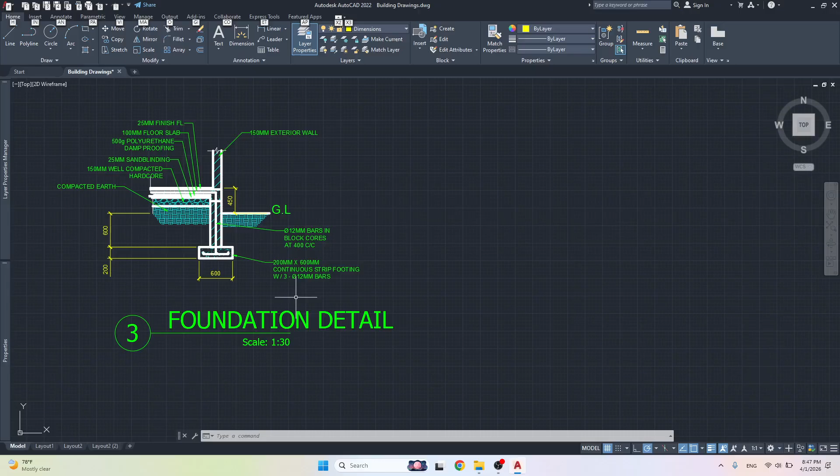In this one, we're going to be looking at another foundation detail, but instead of the corner of the house, we're going to be doing one in the middle of the house.

So let's say, for example, this foundation detail would represent... if we had a cut right here, for example, if we were doing the foundation for this part of the house right here.

So the first one we did was this, the end of the house. But if we were supposed to do one for this load bearing wall, which should have a foundation underneath it, the only real difference between the two is that this one is in the center.

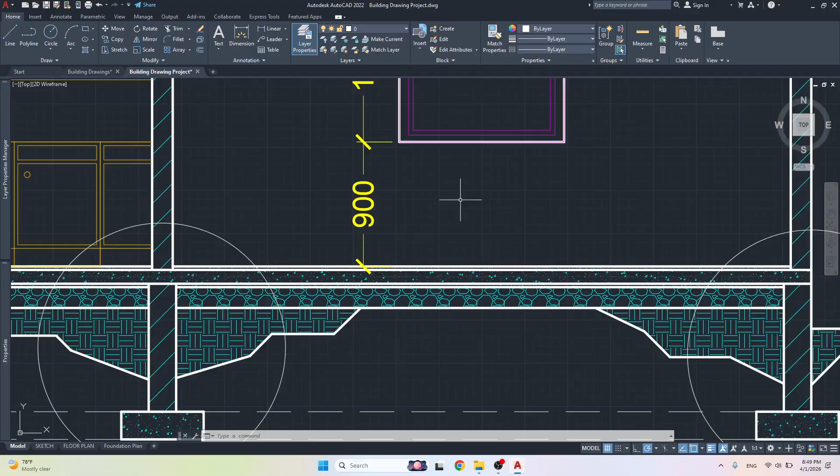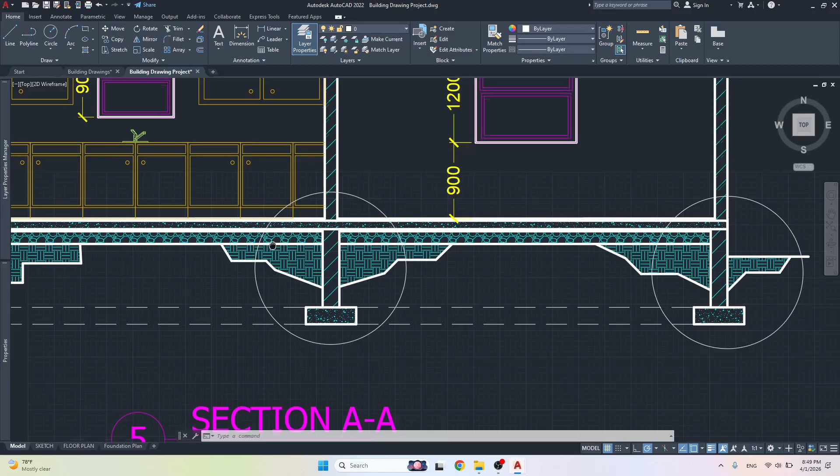When it comes to the walls at the end, notice that the external walls for the superstructure of the house align with the end, into the foundation wall, which is 8 inches. This is 6 inches. But here, you'd notice it's centered between the foundation walls.

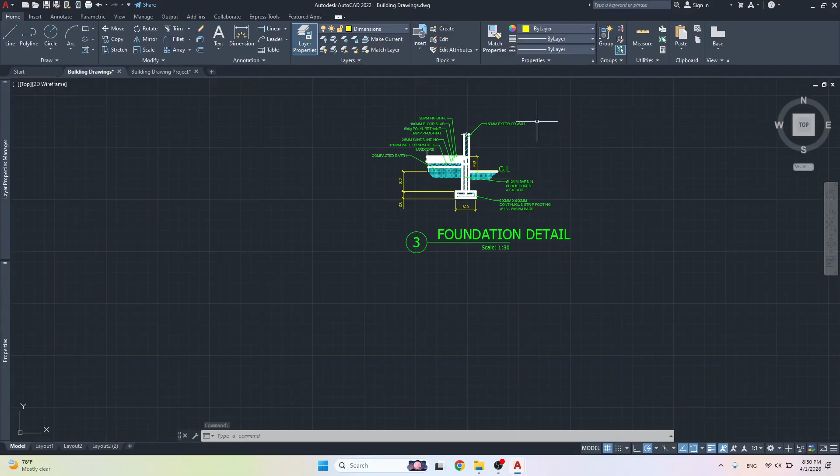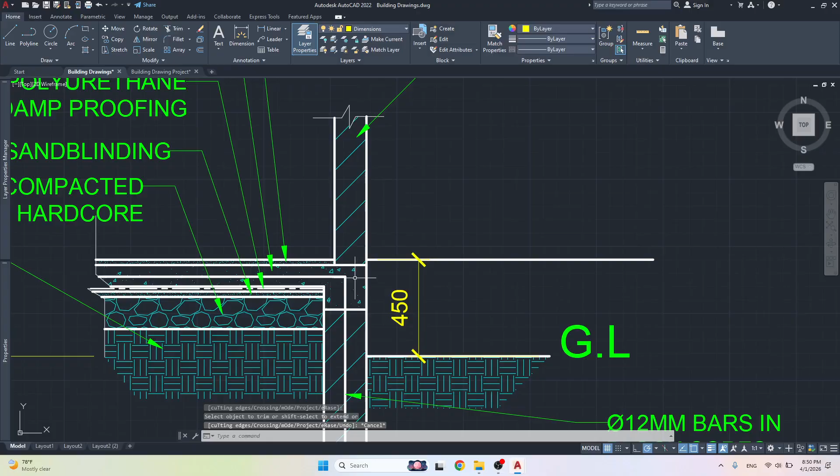So that's what we're going to be doing. Now I could simply take this drawing, make a copy of it, remove this and redraw it more centered right here, extend these lines across, and trim them out. But for the sake of those who might have missed the first video, we're going to do it all from scratch, so I don't have to explain much in this drawing.

So this is going to be a much shorter video.

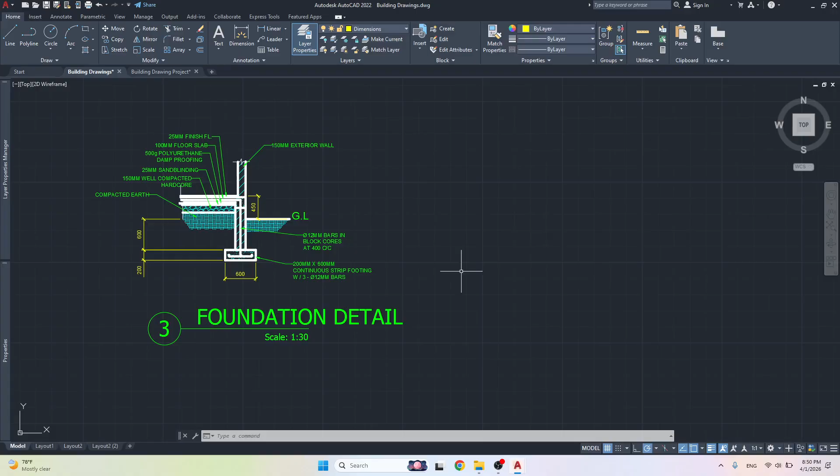All right, so firstly, let's start with some walls. Remember, we're going to do the footing first, which is 3 times the width: 600 millimeters, which is 3 times the width of the foundation wall.

The foundation wall is 8-inch blocks, which is roughly 200 millimeters. So 200, 200, 200, that's 600. And it's going to be at a minimum.

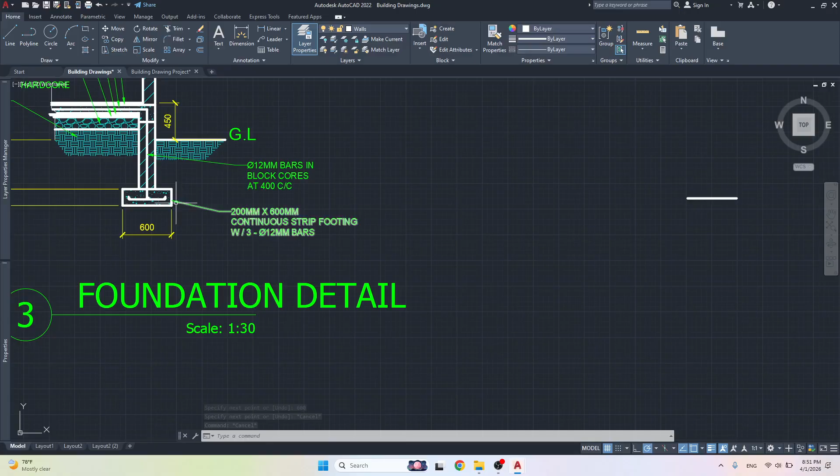In this drawing, we're going to be doing 8 inches, but as you know, by St. Vincent standards, it should be no less than a specific amount—I think it's 9 inches. So this is going to be 200, which is 8 inches. Come across 600, and then we go up right there.

Now, again, I'm going to draw the foundation walls that are centered. So I'm going to offset this 200 from each side. So we have 200, 200, 200, 200, 200, 200.

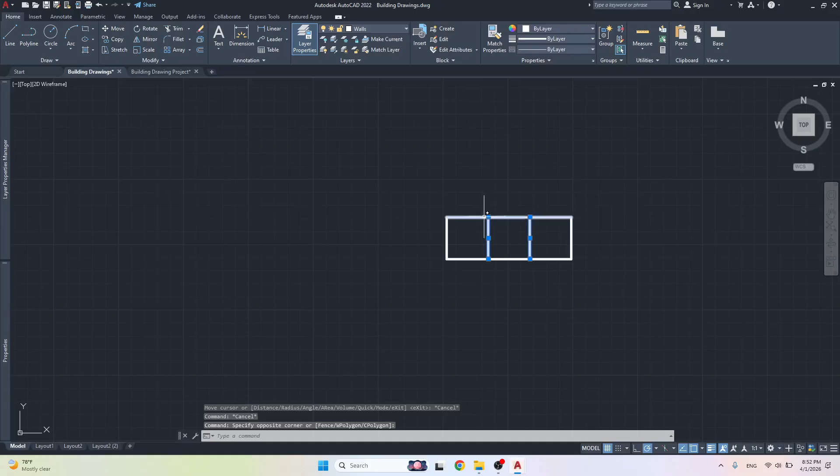So let's just extend these. Well, before we extend them, let's do the ground line. We know that the footing will be buried at a minimum of 2 feet.

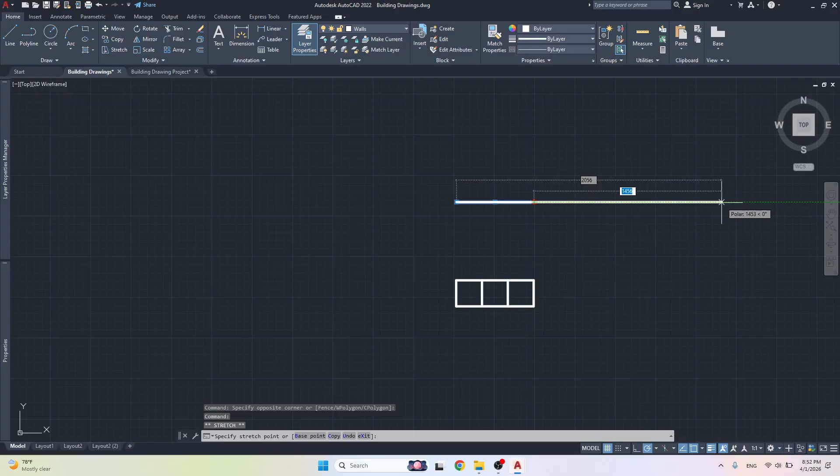So let me offset 600 millimeters, which is 2 feet, upwards. This is going to be my ground line. Let me just bring it across like so. Actually, we don't even need the ground line, to be honest, on this side for the nature of what we're doing, but I'm just going to use it right now as a reference.

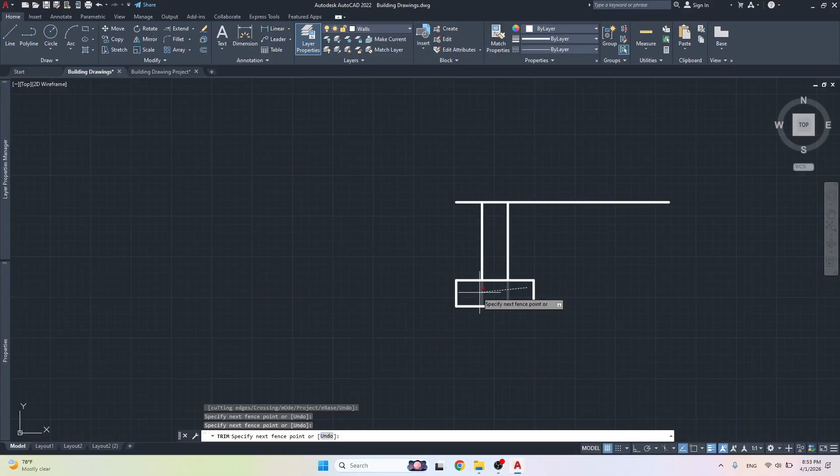Alright, so now we need to extend these lines up, and then we can trim away these down here—we don't need them. So this is where the ground line would be here, showing that the footing is buried at least a minimum of 2 feet below the ground.

Alright, so what we need to do now is offset so we could get the finished floor. So let's offset 1.5 foot. As you learned in the last video, it's supposed to be no less than 12 inches by St. Vincent standards. So we're going to extend these lines up to there.

Then we can get rid of the ground line for now. Alright, so let's just now walk our way back down. So this is going to be our finished floor.

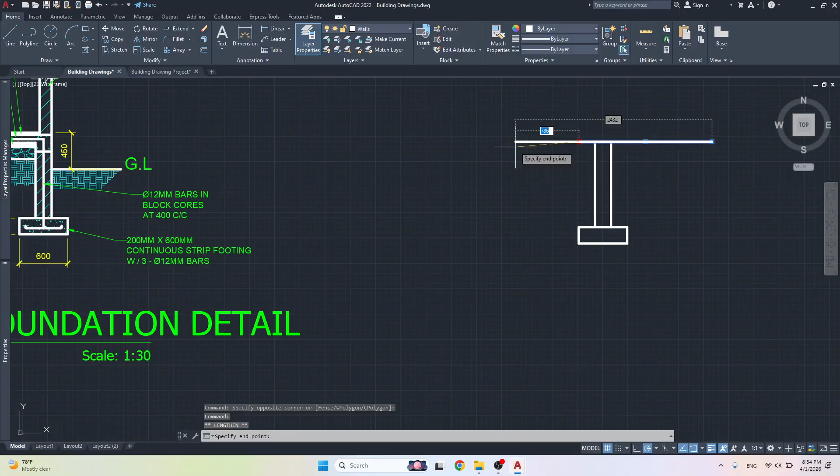Remember what we're doing is we're putting this wall in the center of the foundation wall, and then we're going to be having everything over here—we're going to be having it on this side also. Okay, it's basically going to look like this, but with all the details inside.

Alright, so let's walk our way back down. But before we do, let's offset that inch. This is for the finished floor, but let's remember that the wall is not going to be built on top of the finished floor like so. The wall is going to be on the concrete slab, which is this line.

Alright, so to do this, I need to just find the center. So I'm just going to redraw this line so I can know exactly where the center of this line is, like so.

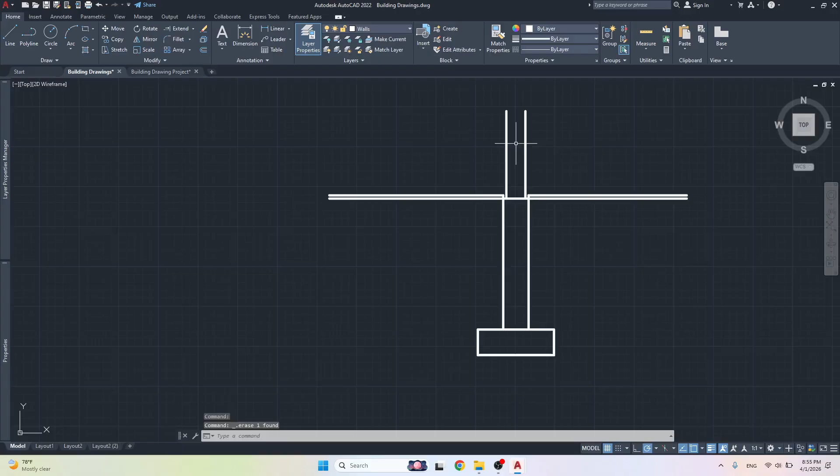And then I can offset it 75 millimeters on either side, and delete the middle line. So this should be 150 millimeters.

So there we have the walls for the superstructure, the structure above ground, and we have the concrete slab right here, and this line represents the floor finish, when you plaster the floor. Alright, so we just need to trim this out.

And extend these all the way up to the wall. So here we just extend these up to the wall. Alright, so now I could just merge these three lines. I select this line, and this line, J, enter. Now they are one line, they are rejoined.

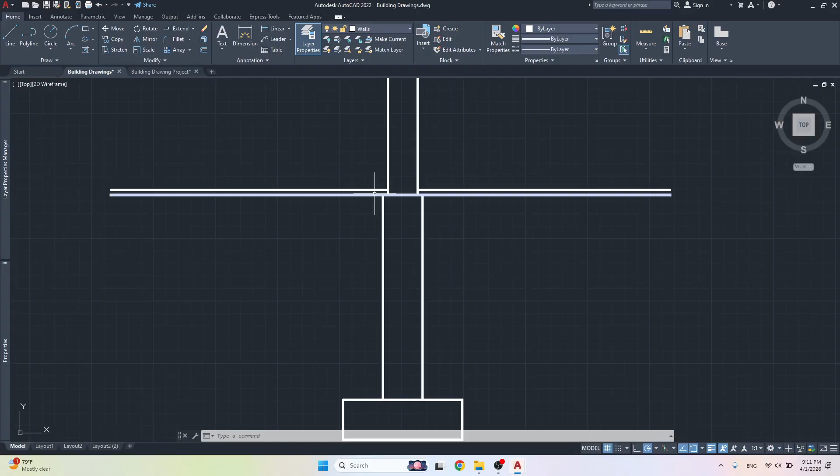Okay, so what we're going to do, we're going to do the floor slab, so offset 4 inches, that's about 100 millimeters. Alright, so we offset down 100 millimeters. Then underneath this, let me do 25 millimeters offset.

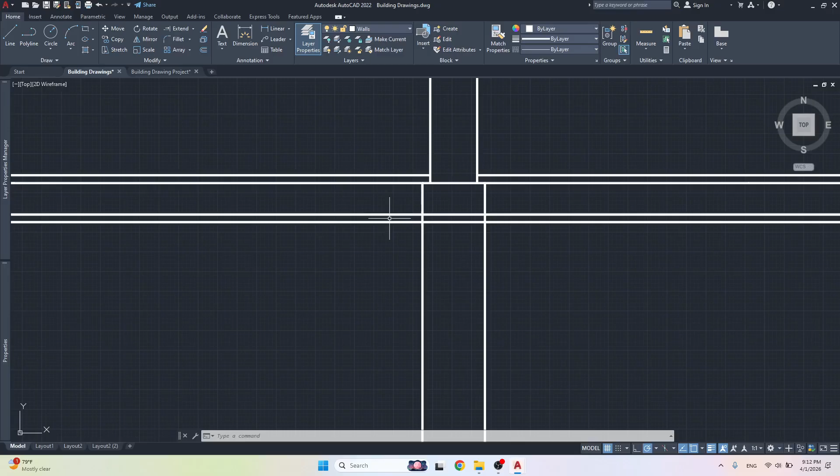This is where I'm going to put in the damp proofing. Some people don't put this, they would mention it, but they won't actually put it because the damp proofing is really, you know, as thin as a plastic bag. It doesn't need a whole inch, but we're just doing it for representation's sake. So we'll put a line through the middle of that, as we did over here.

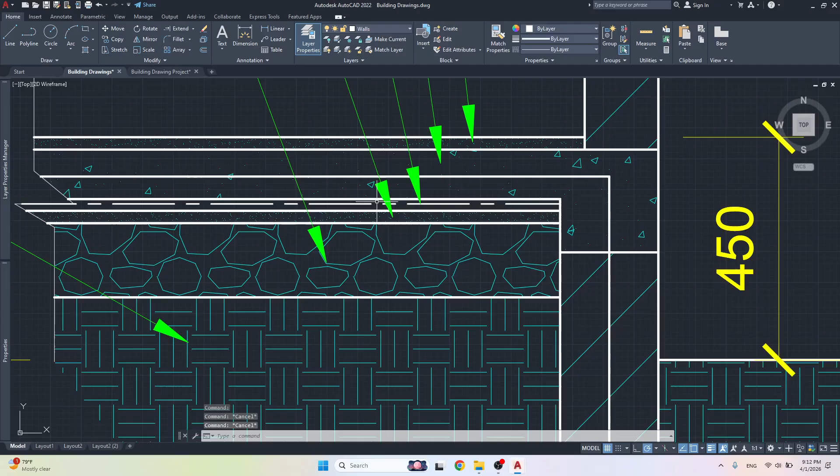Right here, this line, and then we'll do the sand blinding layer, another inch, so offset 25 millimeters, like that. So this is our in between. Here will be our sand blinding, and then underneath that will be the hard core, which will offset 6 inches, 150 millimeters.

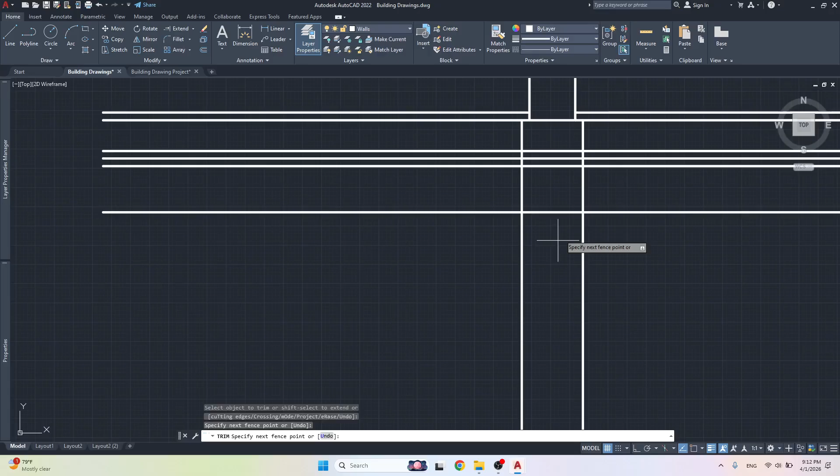Alright, so now we could just clean up in here all these lines, clean them out, and we have them on both sides. Let me just fill in the rest of the information. So let's use the wall layer.

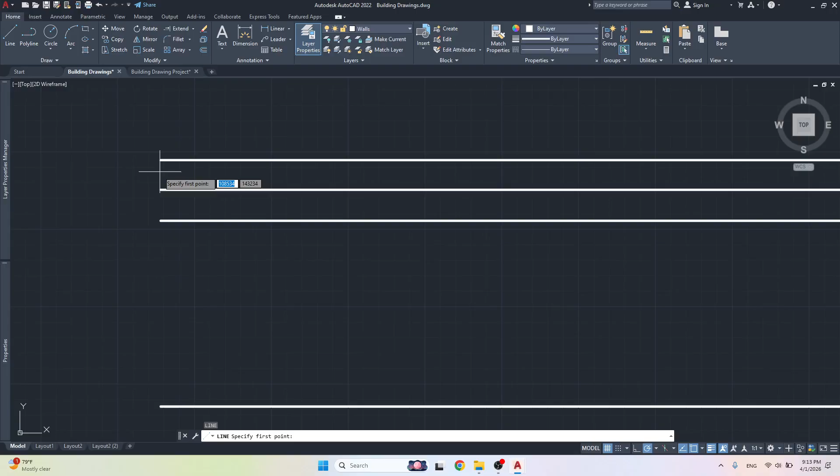As I said, in between here, I'm going to just draw a line all the way through, and then I'm going to turn this line into a center line, and let's make it a little thinner. So maybe 0.20, and we've got to change the line type scale.

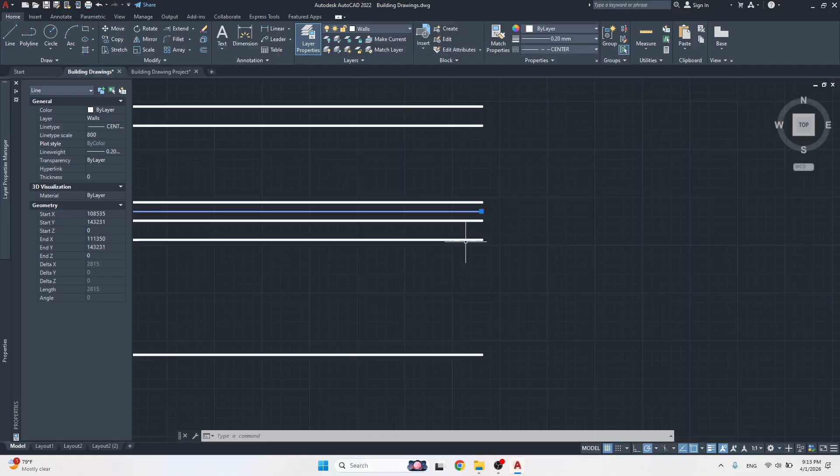I don't know what I used in the last one. It's a little too big, actually really too big. So let's see, 100, that looks good. I'm not sure what I used last time. Let me see, the last one is not. I used 30 and center. Wonder what the line type scale was. 100. Alright, so 100 is fine.

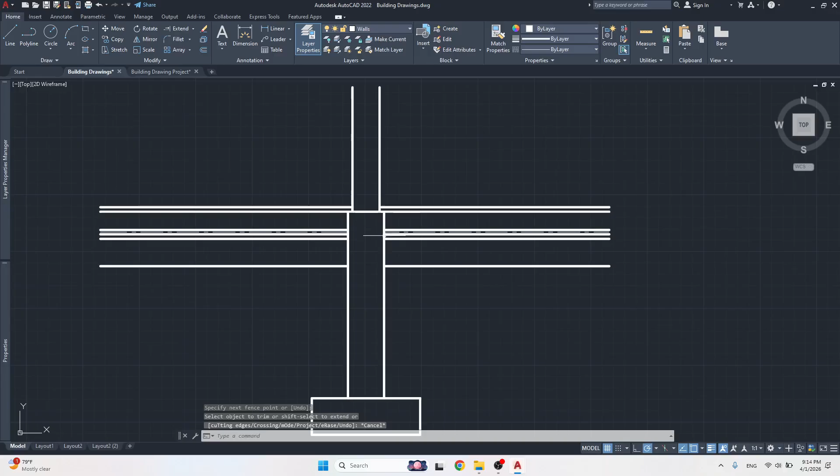Let me just trim this out. Whatever you choose, just be consistent across all your drawings. Alright, so here we have everything.

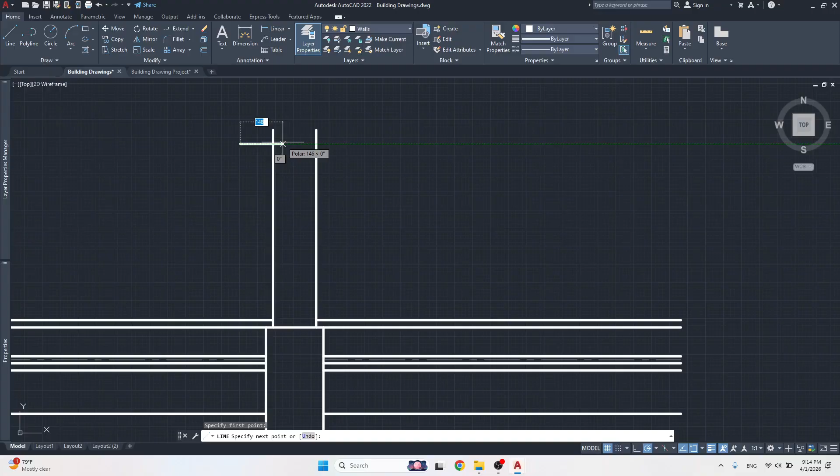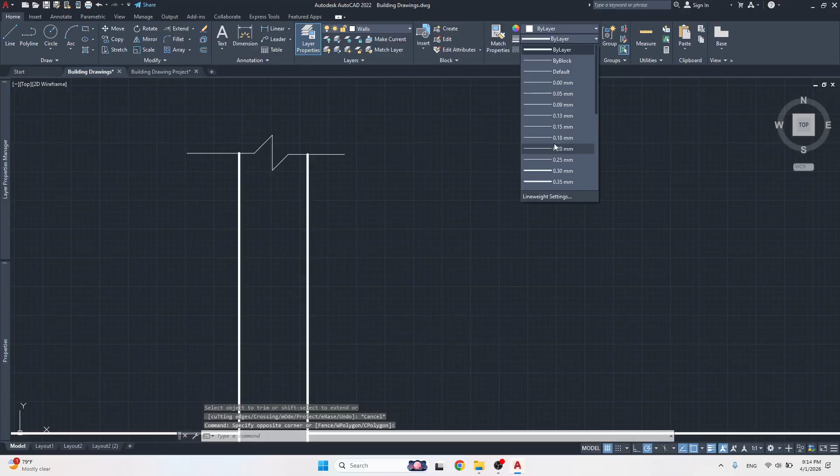We'll just trim away. Right, so as you know, this long break line simply means that... we'll put one here. And right here, and come through like that, and then we'll just trim away the excess on this side.

I'm gonna copy this and put it on the other side right here. Is that too far? Okay, that's fine. And let's trim away all this. Excellent. Alright, so this just means that the line continues, all these layers continue, but we just want to stop it right here. Okay, so let me just change that.

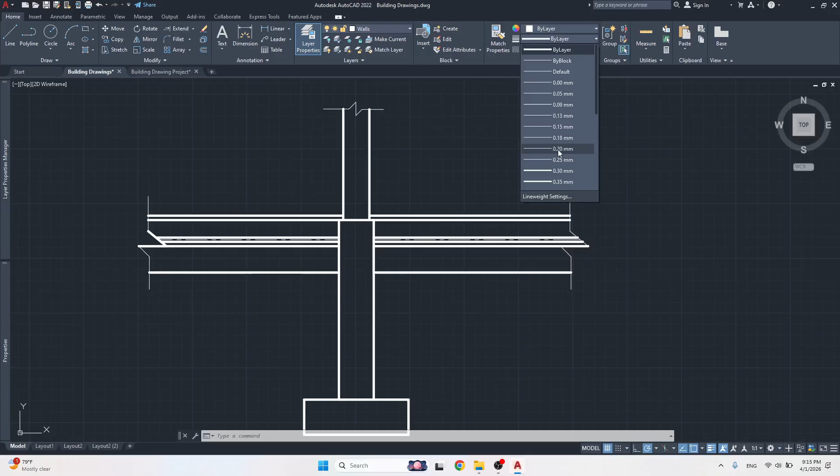Alright, so again, we want to just put our hatch. We'll put in the hatch first this time, so that when we put in the steel, it would be a little easier. Alright, so let's use this one.

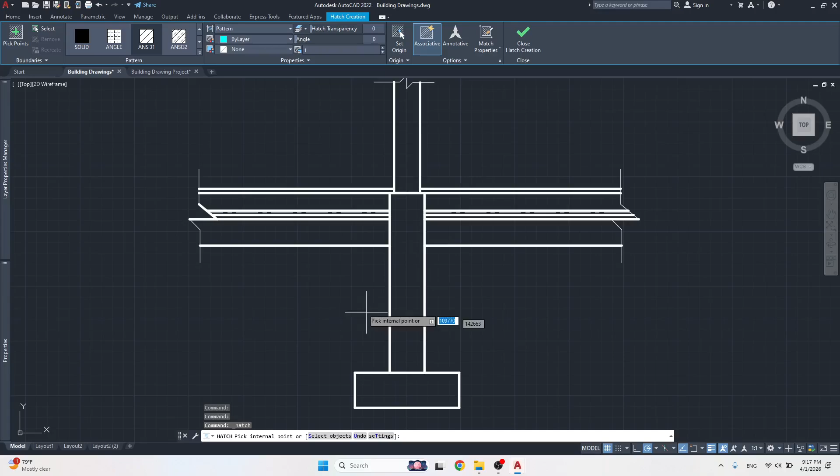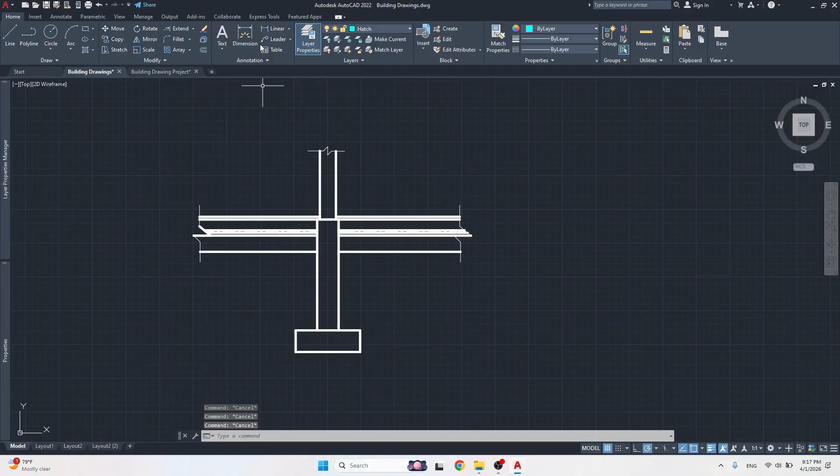So we'll use these, as I said, for the lines inside the hatch line. I'm not sure what I used in this one. Line type scale 800. Alright, so we'll change this to 800.

You could choose whatever you want. Escape, and then we'll use concrete, this one. We have to change this.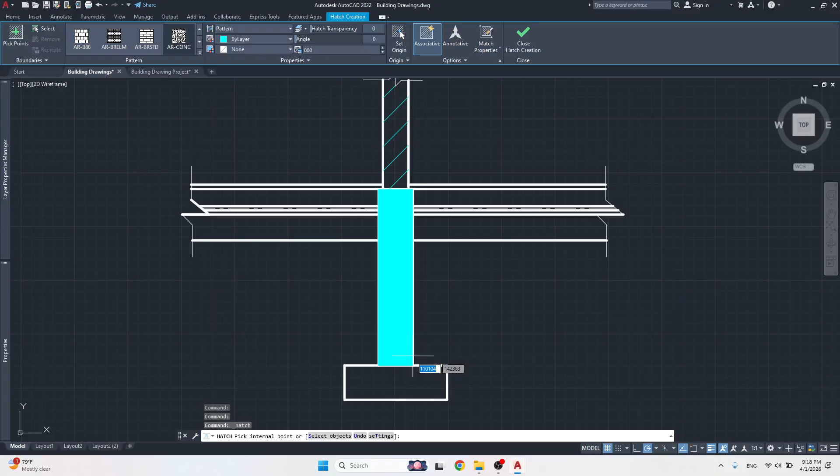Still too big, 50. I'm not sure what I used in the last one. So let's see, 20. Right, that looks fine. So the concrete slab.

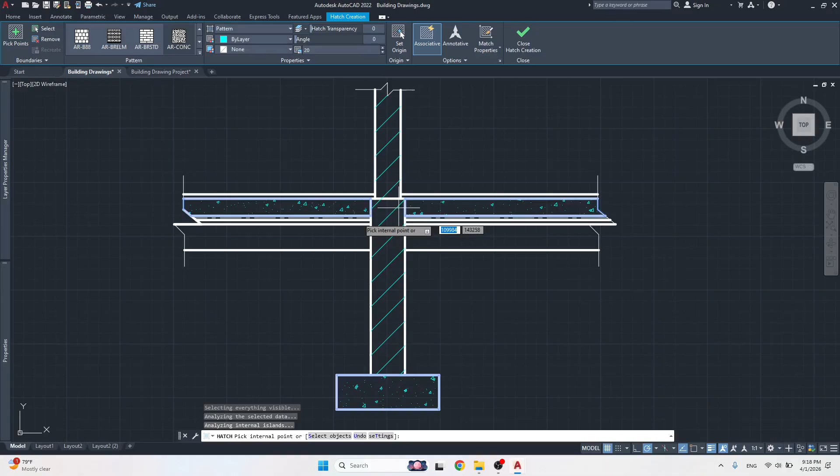Okay, so what's next? Let's do escape, and then we'll do another layer. Alright, so we have the sand blinding on the finished floor. So we use AR sand.

Let's see what we can use here. 5, alright, this is a little too much. So let's say maybe 10. Let's see if that looks, yeah, 10 looks similar.

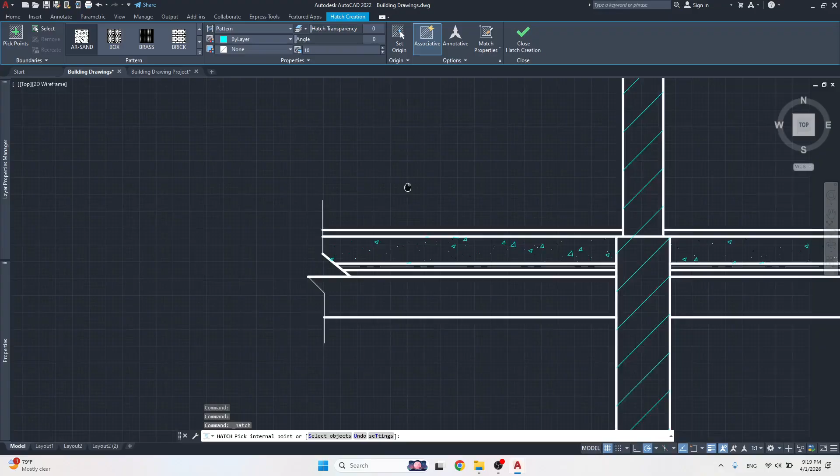Alright, now I could always just match properties to the one that I previously did. So that's the finished floor, and then here's where we're going to put the sand blinding. Down here now we have to put our hardcore.

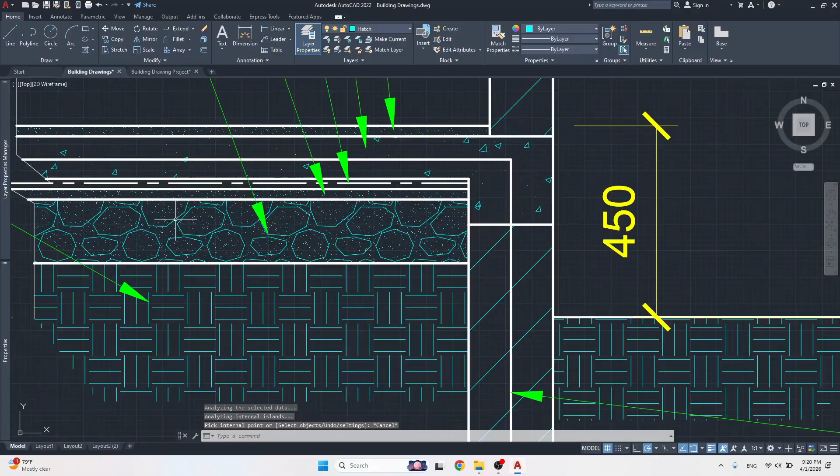200. All right, so we'll use that over here. Let's see what this is. 300.

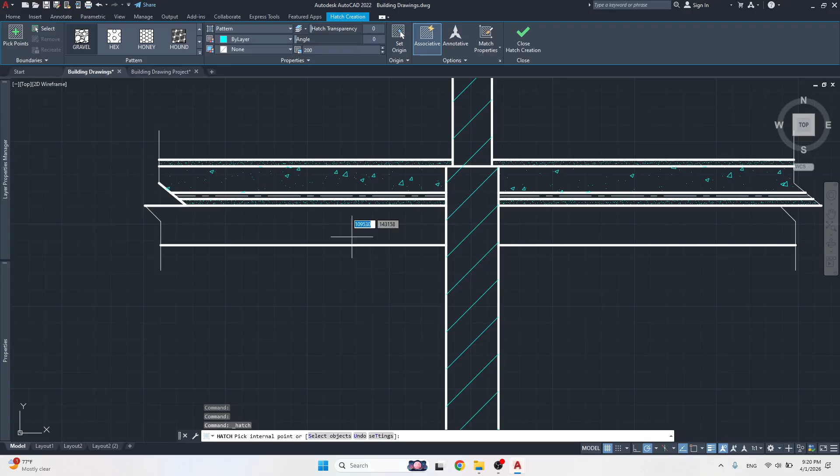So let's look for the gravel. I think I passed it somewhere. Nope. Gravel, and I believe it's 200 we used for this one. So there, and then we can figure out what these should be.

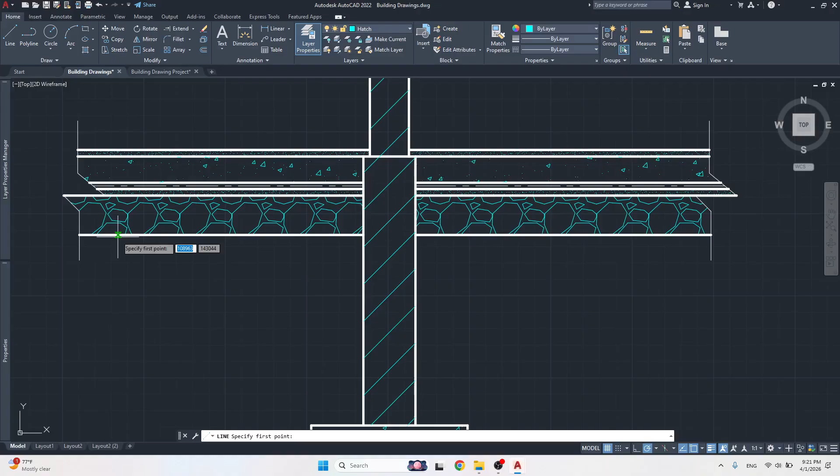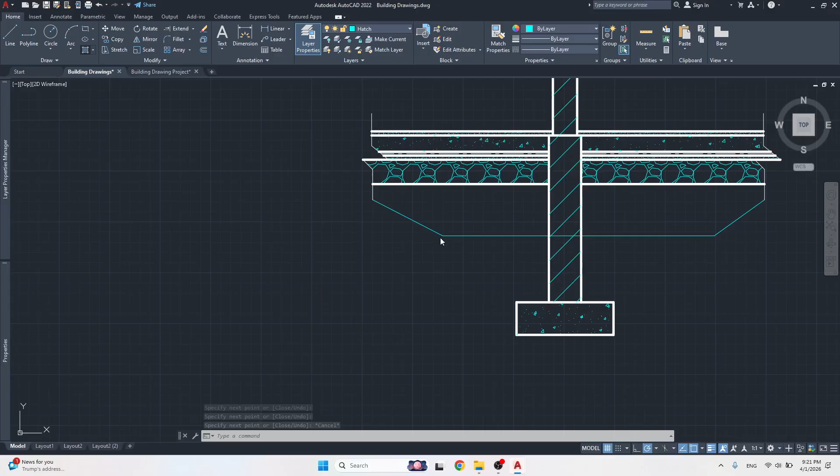All right, so let's draw a line to represent our compacted earth, this is where it's going to go. I'm going to remove this line just now anyway. I think we use 300 on the other side for the compacted earth, and then we could just get rid of these lines.

Alright, so it looks a little neater. So all here will be compacted, but we're not going to draw it all around this, it's going to look too crowded. I mean, this is basically drawing. We just need to put the steel inside.

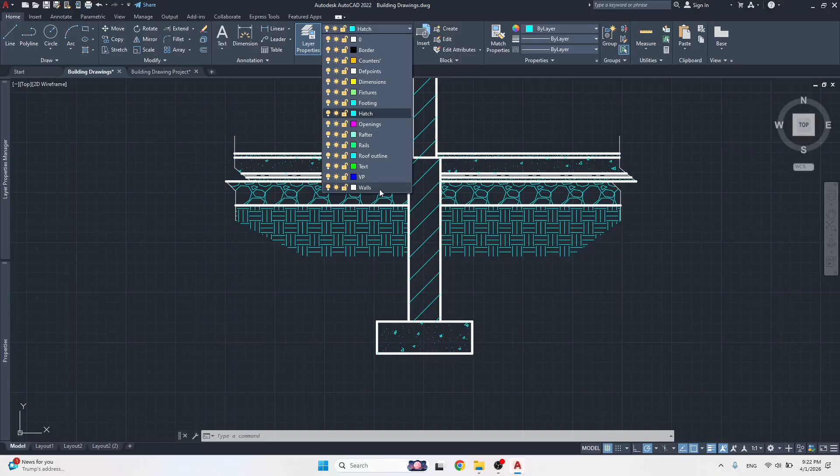So let me just switch back to the walls layer, which is very thick, and let's offset. I believe it's 3 inches, so that's 75 millimeters. Offset here, here, here. Then I'm going to fillet it.

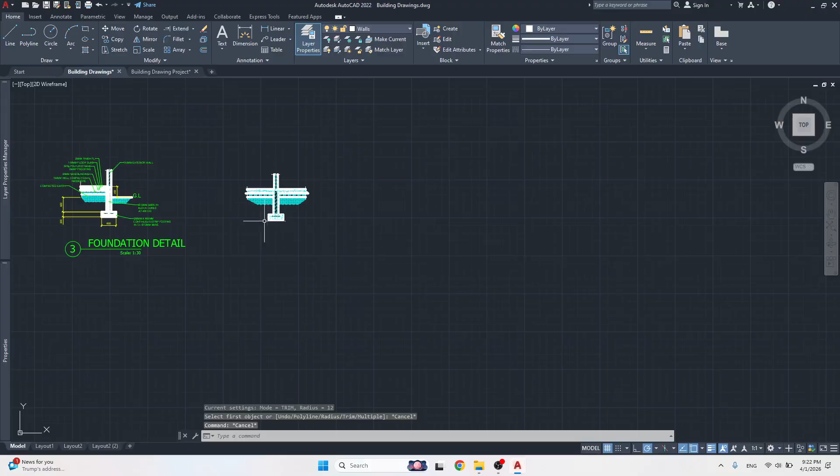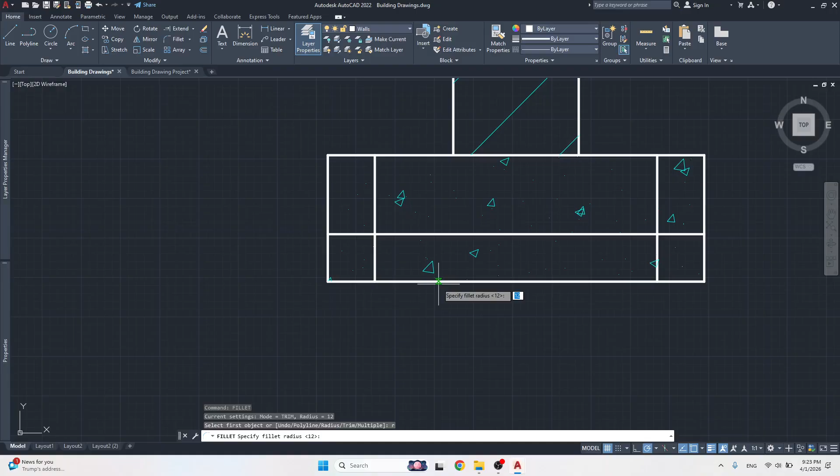Not sure what radius I used. This circle has a radius of 6, so the right 12 is the radius I used there. So let's fillet it with a radius, our radius 12 is already there, yeah. Here and here, and then I didn't hit multiple here and here.

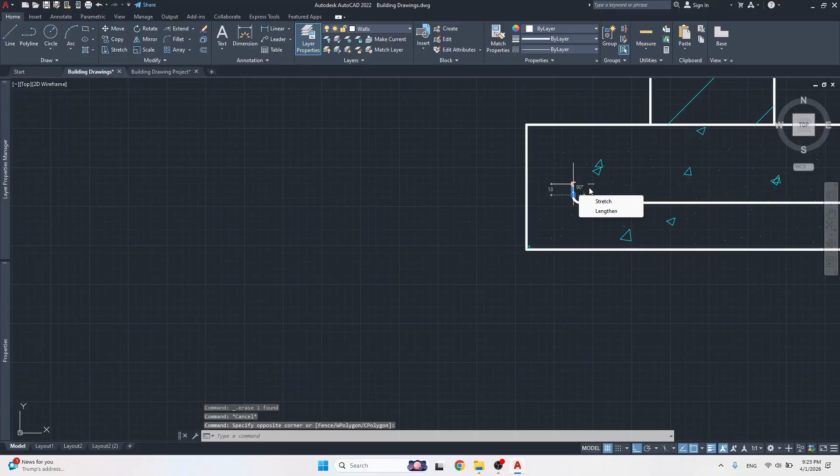Alright, so let's bring this down to about here, let me just keep it straight. Bring it down to about there. Now I could actually just get rid of this and copy this one. Pick it up right there and carry it across there, just for the sake of consistency.

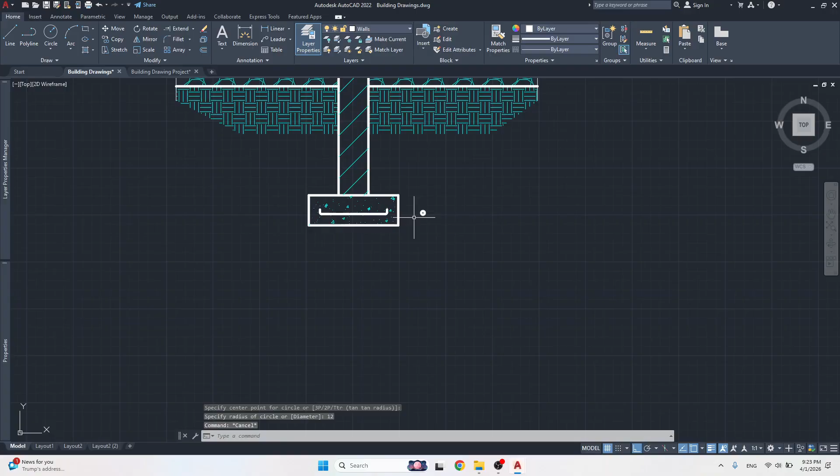We're gonna take some circles, we want one in the middle, but the radius of the circle is going to be 12. Is it 12? I believe it's, let's see if it's the same. So the radius, diameter is 12, so the radius is 6. Right.

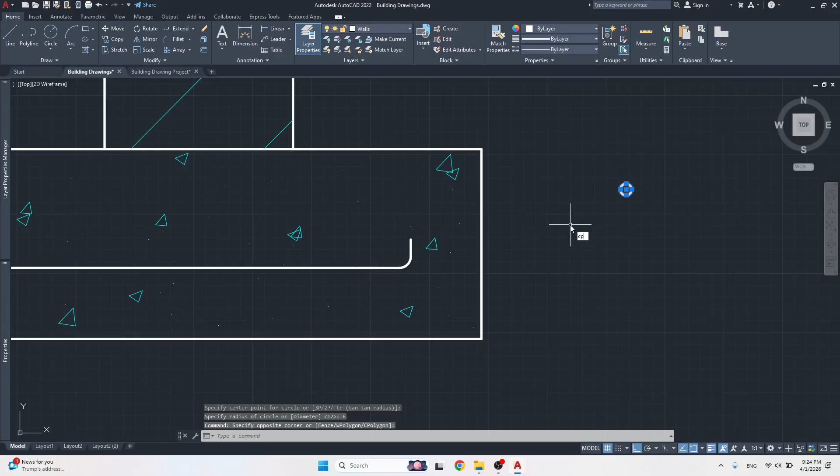Alright, so let's do a circle, radius is 6. Did I use the right circle tool? Right, center radius 6. And let's place them, now this doesn't have to be 100% accurate or anything like that. The other one goes somewhere here, it's a little too high. Hold a second.

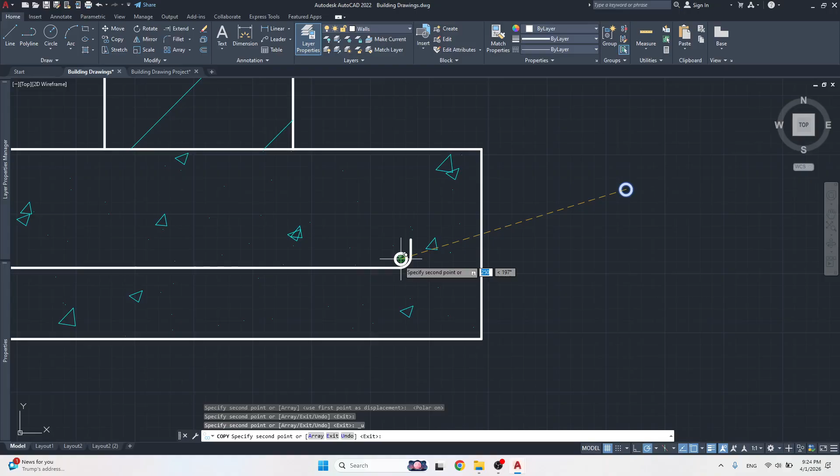Let's put that there and pull it across to the other side, like so, and then this one in the middle somewhere, like so. Alright, we'll just fill this up with a solid hatch.

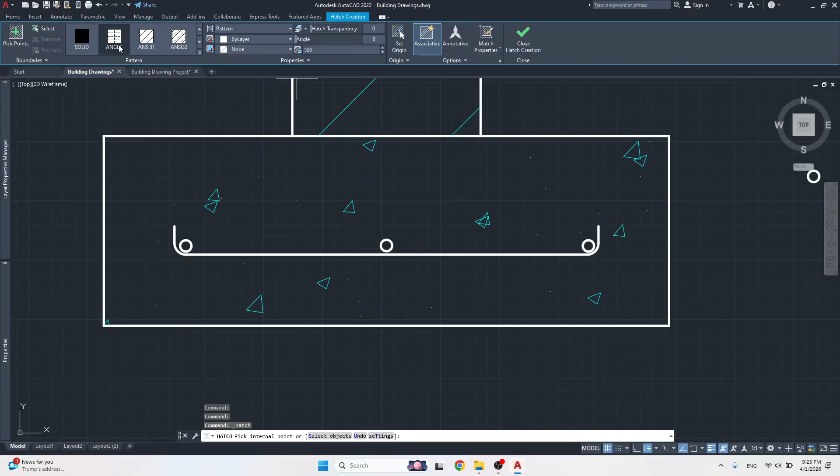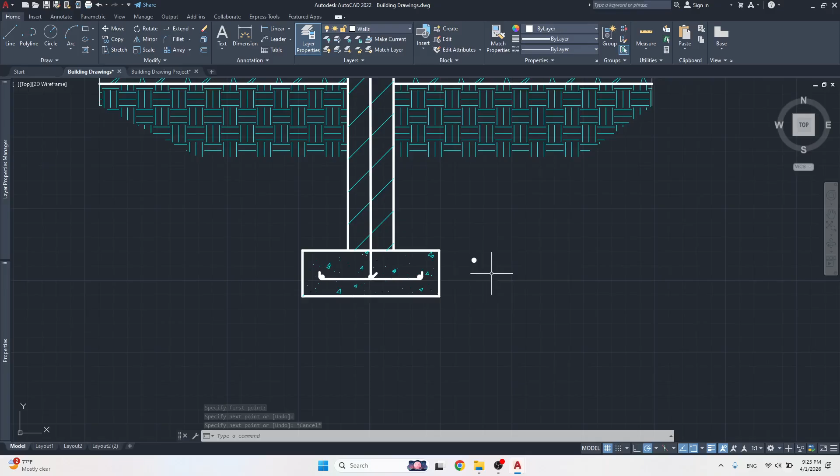These are the steel, and then we'll run a line from the center all the way up, with hooks back like that. Yeah, so we have the steel there and everything. Now we could also put in some other representation, some other details, but this should be enough.

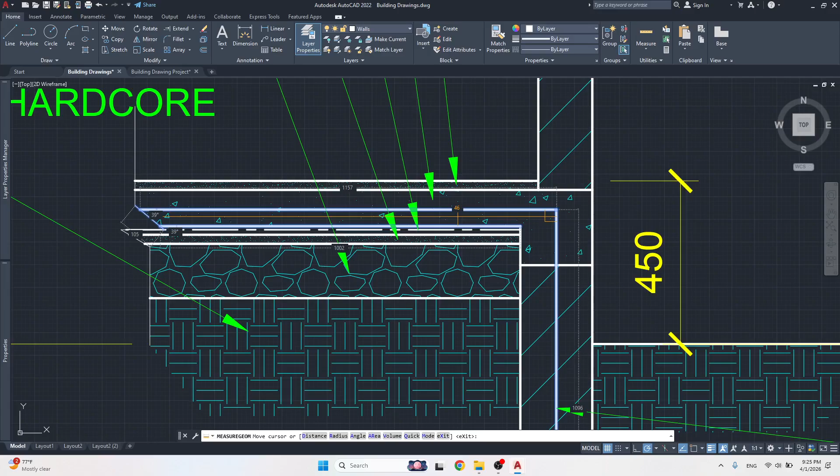We also need the steel that's running inside of the floor slab. All right, so let me just offset this around 50, and on the other side I have it 46, so I think I just drew that line.

The reason why I'm not being so specific about the placement of this line is because the builder would know exactly where to put it, and we are not going to specify it in the drawing, so there's no need to try to put it a specific place and all of that.

Alright, now really and truly I believe this concrete slab really should come all the way across, so like this concrete slab, we join that, and these lines are already joined. So in here, this would come a little bit down.

Alright, so this is already 4 inches, let's offset this. Let's see if I come here, pull a line down. So this is what I'm doing, line tool, I'm hovering over, I'm not clicking.

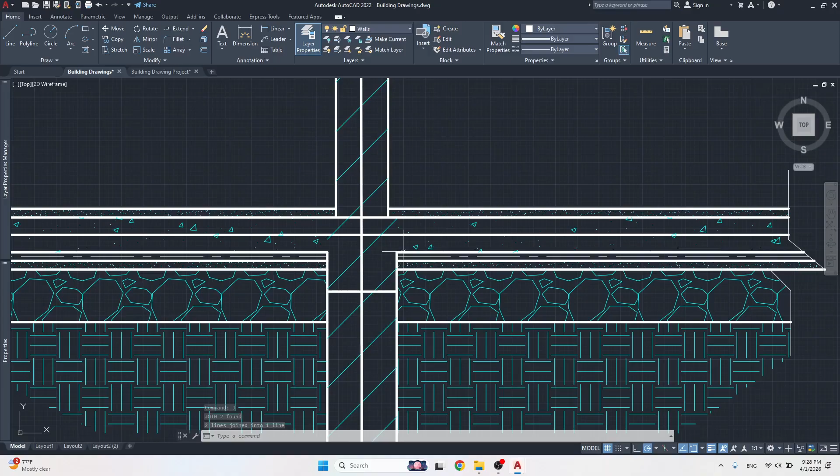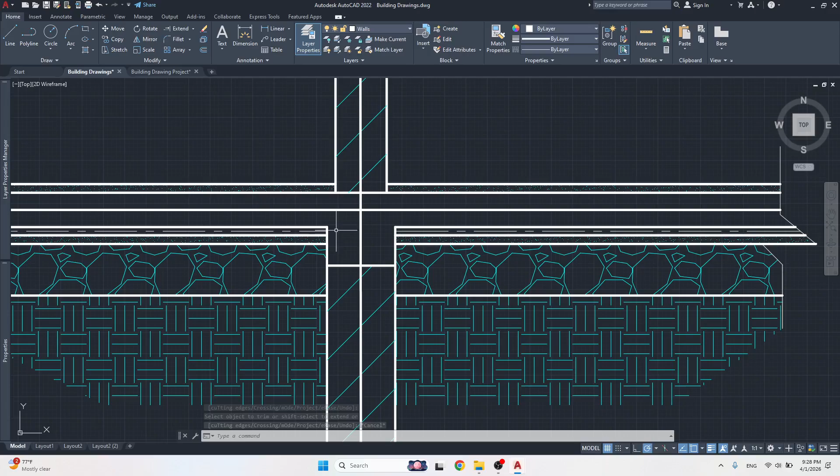We'll have to redo this hatch, and even this hatch right here, I don't think I could trim it. Can I? No, I can't. Yes, I can. But if anything, I have no problem doing it over. It's not a problem. So this is the floor slab, and it's going to come all the way down here. This is where the foundation wall will start.

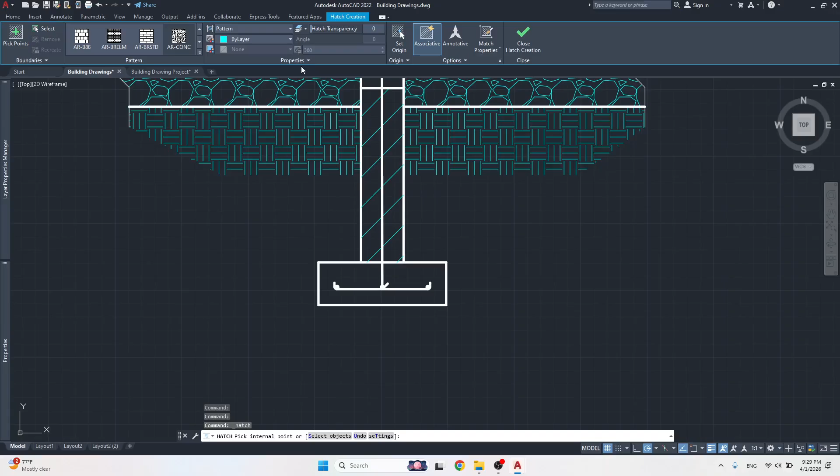So let's go back to the hatch, and then we'll use the concrete. Oh, it removed the concrete, the AR-CONC down here too. So let's go back there. I'm not sure, I already forgot what I used. 20.

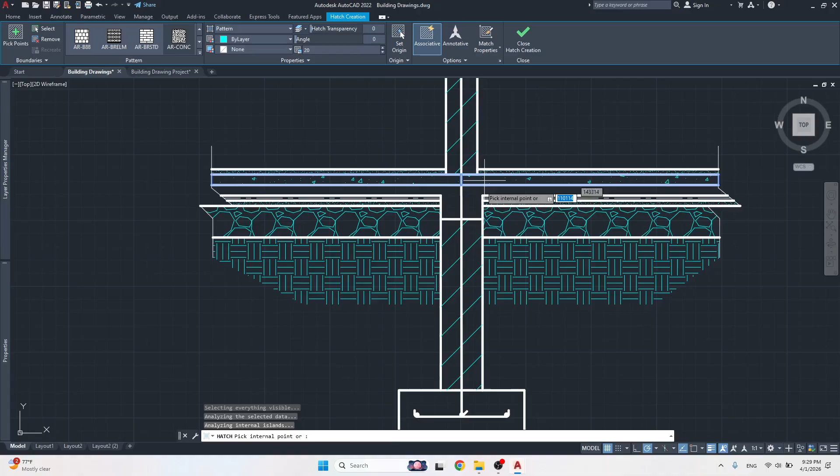All right, so let's hit that. Yeah, CONC 20, and we're gonna fill this all back up. And this down here. Alright.

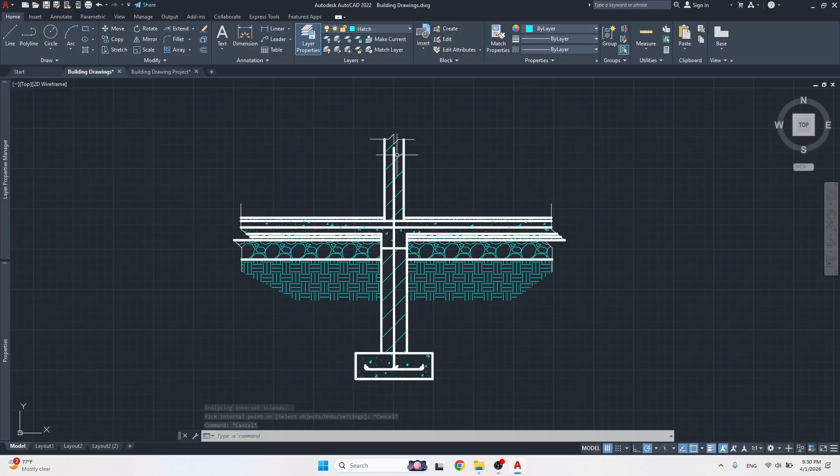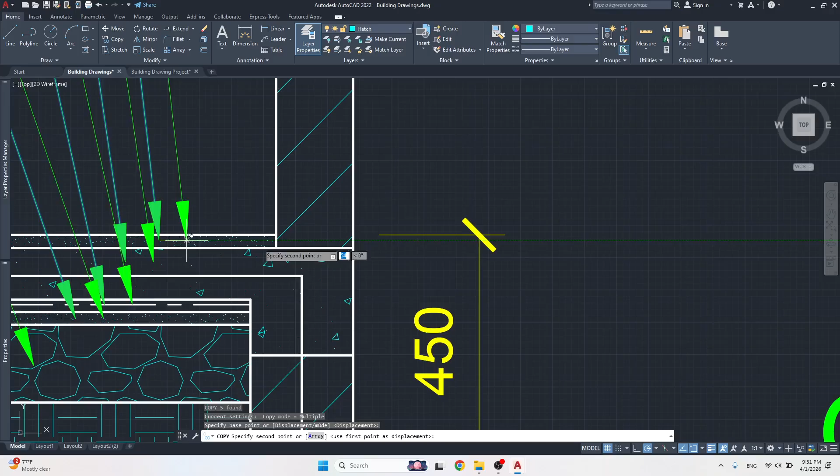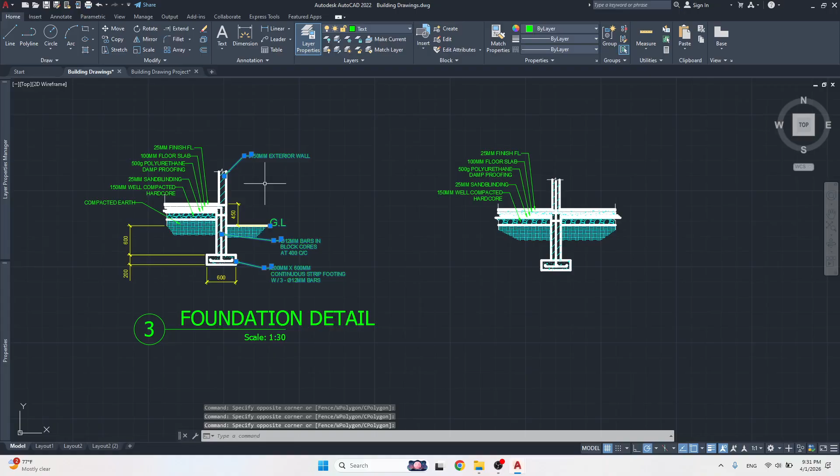Let's copy all of these. This one. Now you could use your leader and type them over and everything. If you're doing this for the first time, put in all the information. So put that.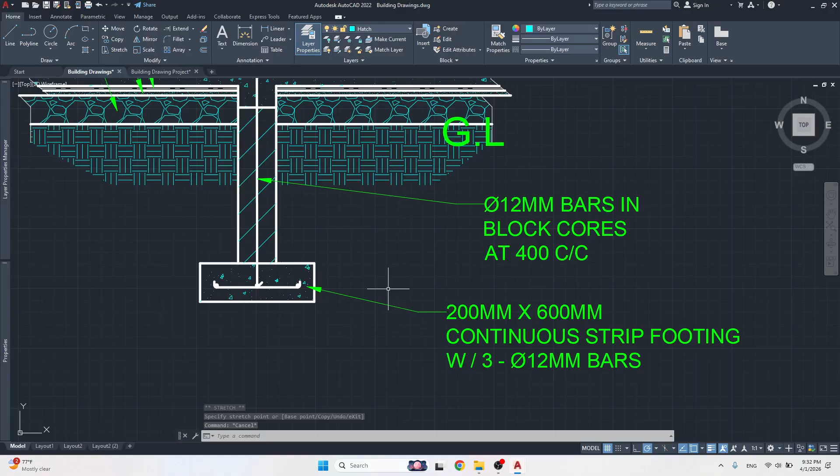I'll need to move this like so, and right, this is there. That's correct, the ground level, the ground line. So we won't need this. Right, so there's no step up to the house and all of that.

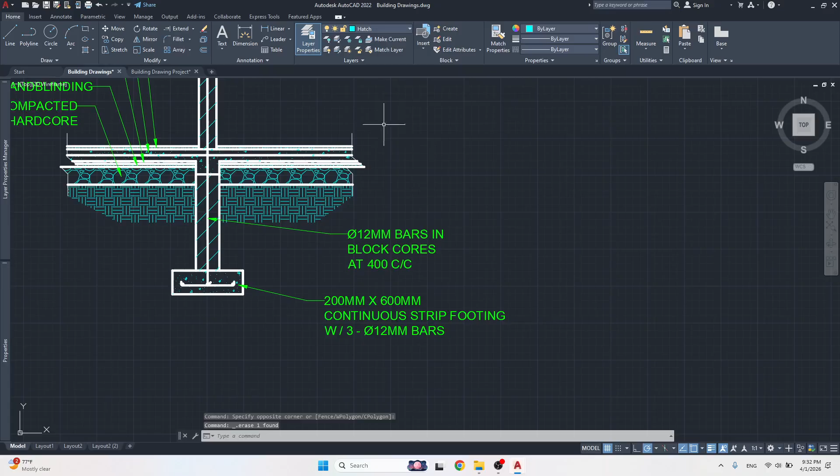There's one thing that we forgot. Let me just make a copy of this one also. Alright, so it's the internal foundation detail. This is the external wall foundation detail. We still miss this one, so let me copy this.

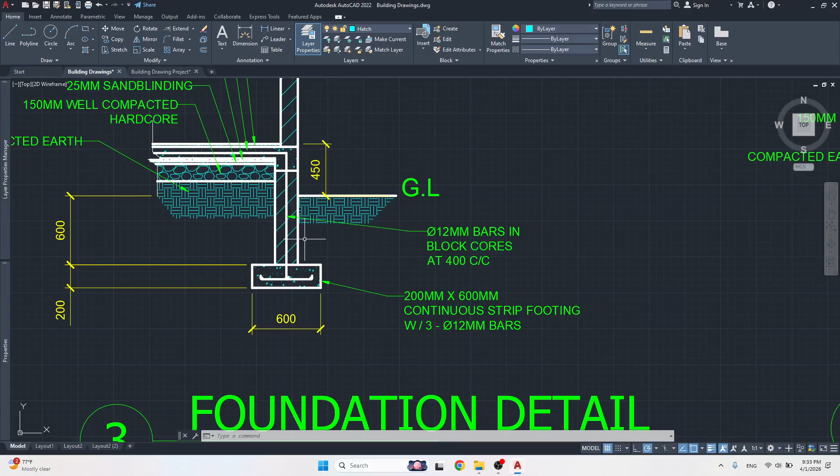Right, we still missed something from the last one. We did not call out the walls. Alright, so we were supposed to put in, let me just dimension this first. Dimension linear.

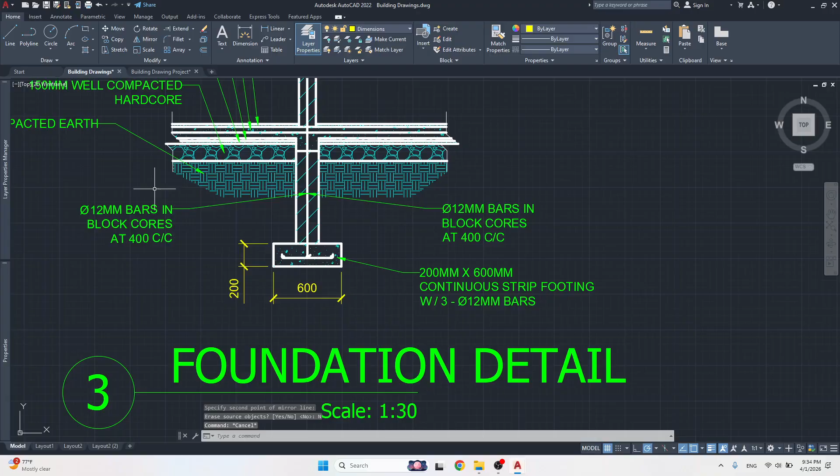We did not point out the wall, so I'm going to just take this, make a copy of it. Actually, let me use the mirror. Select this, the mirror line here. Do not erase the source, and let me just move this pointer to the wall. So this is going to be the 200mm foundation wall.

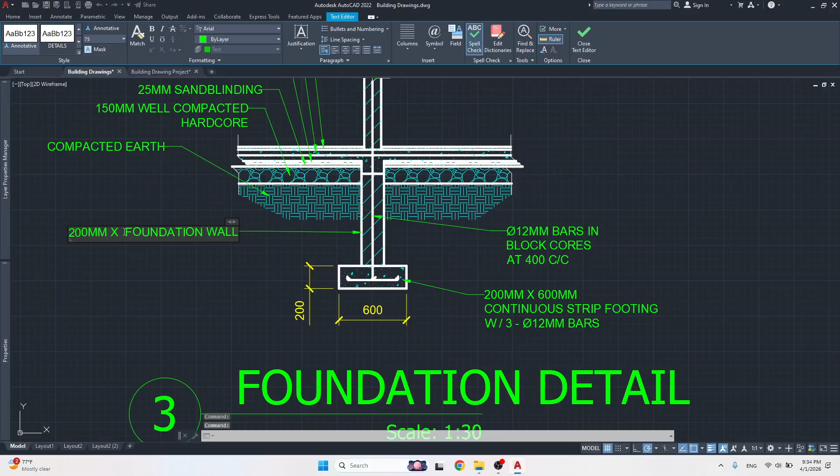Alright, it's 8 inches wide. We could actually say 200mm by 200mm because it's 8 inches wide and it's also 8 inches high. Alright, 8 inches thick and 8 inches high. So 200mm by 200mm foundation wall.

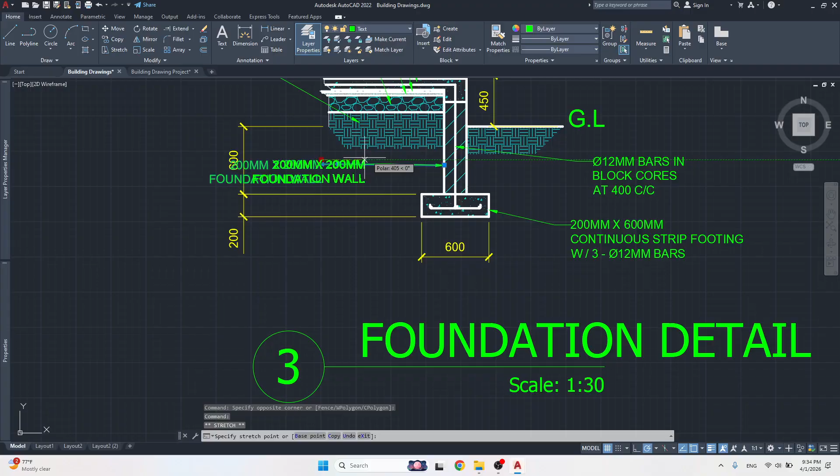We did not point this out in the last drawing also, so I'm just going to move that over there. I didn't even realize until after I ended the video. So let's move this in a little bit like so. So there we have it.

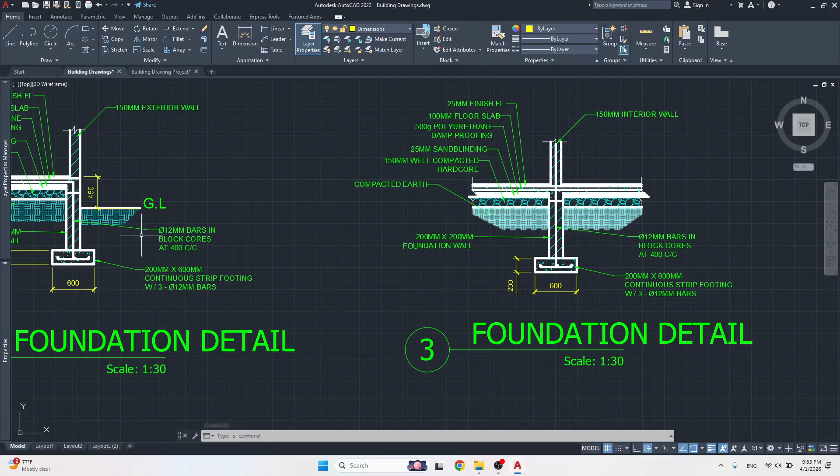This is not an exterior wall, this is just your interior wall. Alright, so there you have it. We have the foundation details, one for the exterior, one for the interior. They're basically the same except this piece is different. This piece at the top here is in the middle, and instead of having it aligned at the end, it's in the center of the foundation wall.

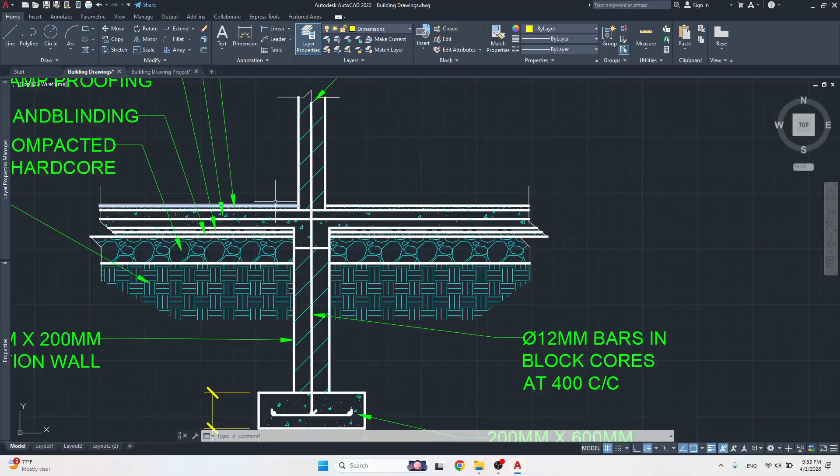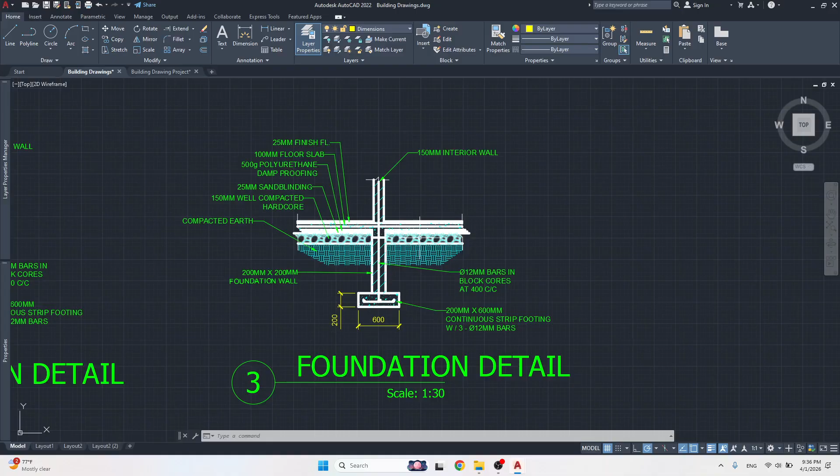And then we just have all of the other elements, all of the other layers on both sides, except instead of just one side as such. Yeah, so in the next one we'll be dealing with the eave details and the ridge details, and then after we've done all of those, we are going to do the full section, which is going to basically include all of this on the corners. It's going to include the eave details.

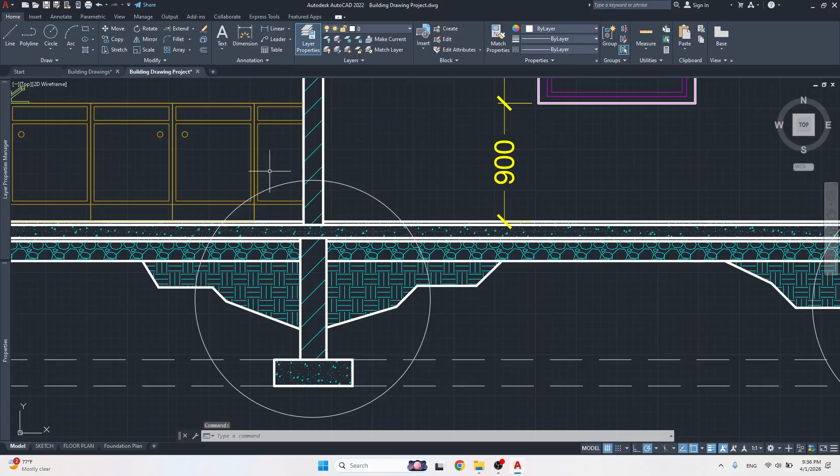Your section is always going to be showing, you know, this end, any internal walls, load bearing walls that have foundations under them. It's going to be showing the details of the eave. This is not detailed, you're not seeing all of this stuff in it. It's just there's no wall plate and ring beam or bond beam and all of that. There's none of that being shown.

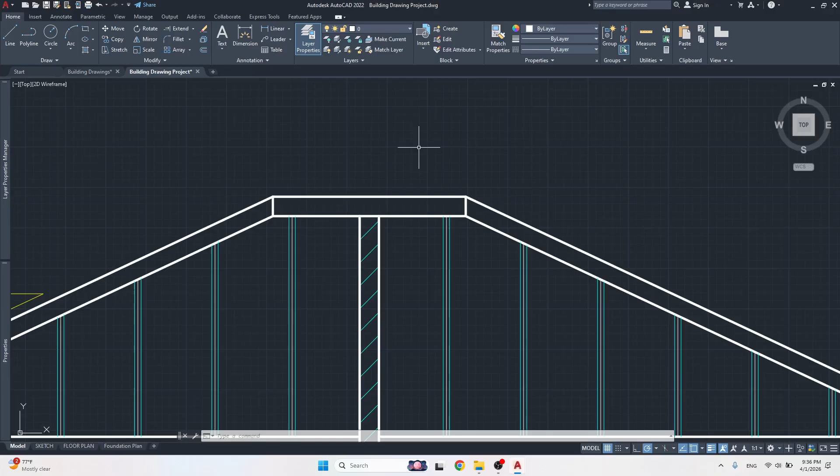But in the eave details, we'll put in all of that. We'll also do a ridge detail, not from this side, but if we cut it the other side, how the detail of the ridge would look. We're going to draw it from that side. Alright, so that's if we cut like this and we look in this direction, look in that direction. Alright, cut the ridge and we look to the left or to the right, how it would look. That is what we're going to be drawing.